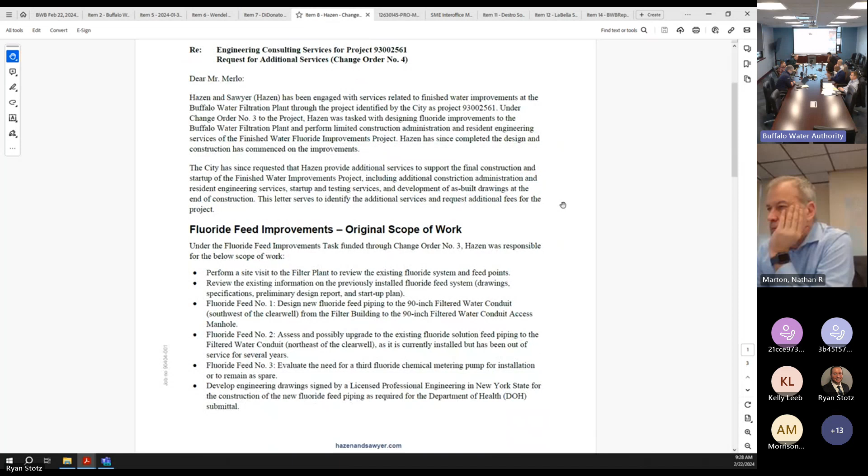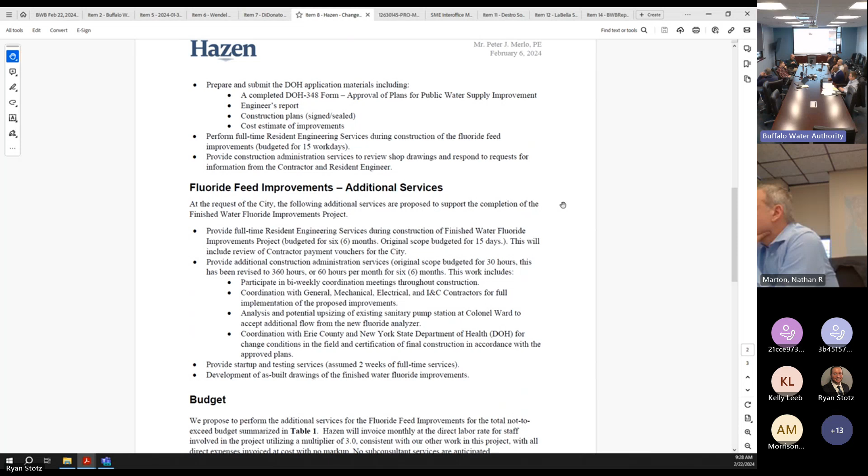This project is a large-scale project looking at improvements to our clear well. Part of this project is updating the chemical feed to the clear well at different locations, including corrosion control and other chemicals, including fluoride. Because of recent discussion and health department commitments we made, we first asked Hazen, this is the Hazen contract, to pull out the fluoride as phase 1 in the design, to help us get health department approval.

Now we're asking them to implement that, and then they'll continue with phase 2. Phase 2 is the big bulk of this project, which is optimizing our clear well.

We have a 30 million gallon concrete structure underneath our treatment plant that stores the treated chlorinated water. We need to optimize the baffling in there so the whole volume gets used up, because there's some short circuiting going on, so you're not getting contact time credit. Your water has to be in contact for such a long period of time to meet regulations. It does that with the clear well. We're fortunate to do it with other basins, but we would like to do it with our clear well too, so this is going to optimize it.

It's really installing hatches and gates, not that difficult of construction. The difficulty is what you have to shut down because you're doing it in your potable water. How do you dam it off? Can you do it with divers and fully disinfect? Are there construction techniques allowed in potable water? There are some, but not always.

So the difficulty with this is how to do what we need to do once they decide: I need so many more hatches, I've got to replace so many gates, so many valve arms. Okay, how are we going to do it now? There's the cost, how are we going to phase it?

That's phase 2. Back to phase 1, this is the continuation. The initial contract we had budgeted had $82,000 for the fluoride implementation, and really that was the design, the drawings, and getting permission. This is now the construction inspection, the implementation.

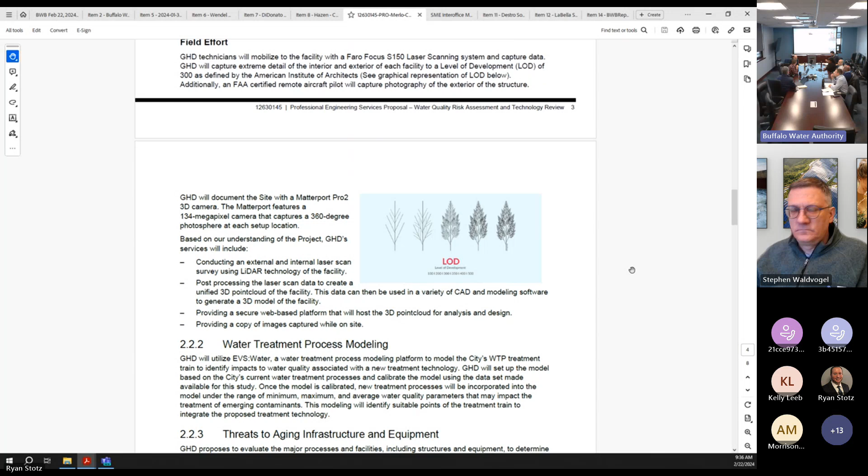May I ask a couple questions on this one? So my understanding of what we're going to be getting here is a technical memo, really kind of identifying threats as well as potential solutions and a high-level opinion of probable cost, right?

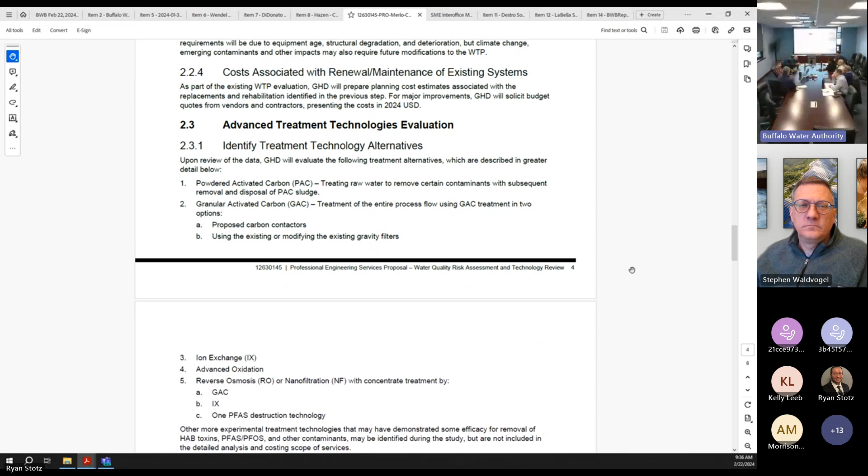Right, tools and treatment methods that give you a lot of options. That may give us multiple options, and what we're going to be using can be built and used in our facility in a practical way. Yes, I think that's one you're going to see somewhere, somehow. Is there something in addition?

I don't know if there's going to be a technology that replaces activated carbon. I think that could be part of your treatment tool. Where do you put it? How do you do it? And then are there other tools on top of it?

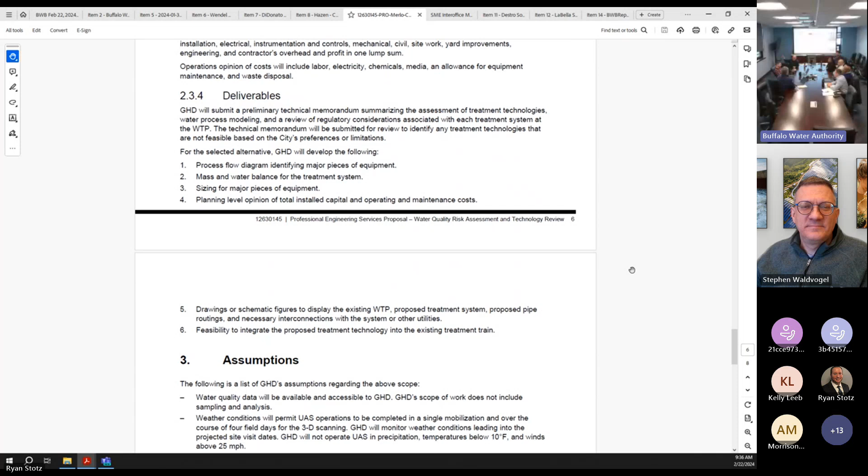All right, so okay, I see advanced oxidation processes as well—other things you want to consider? I don't know. Stephen, I don't want to take your thunder. I don't know, if you want, Steve, let's hear it. Don't say RO. You can treat seawater, I think. All right, you're up.

I think for the most part, enough has been said. There are three primary phases of this analysis. The first one is to look at your source water and attempt to forecast what the risks might be to your source water quality.

So Steve, are you predicting, are you going back to Toledo? Are we just going to say that what's happening there is going to eventually slide down this way? That's a possibility. As Peter mentioned, the conditions on this end of the lake are different. However, as climate change and other changes occur, it's increasing the likelihood that you could face something similar. It's probably not as prolonged, but those are the types of risks we want to evaluate.

The one risk you've obviously been experiencing is the intensity and frequency of storms, and you've proactively addressed that, or you're in the midst of addressing it. But as water quality changes, the other dynamic is that regulators are also changing. So not only is the water quality maybe worsening, but the regulators are getting more strict. We'll be looking at regulatory trends, including the contaminant candidate list over the last few cycles and what's on it now, and how that might impact your permit and what you put out to your customers. So that's the risk assessment from a water quality standpoint.

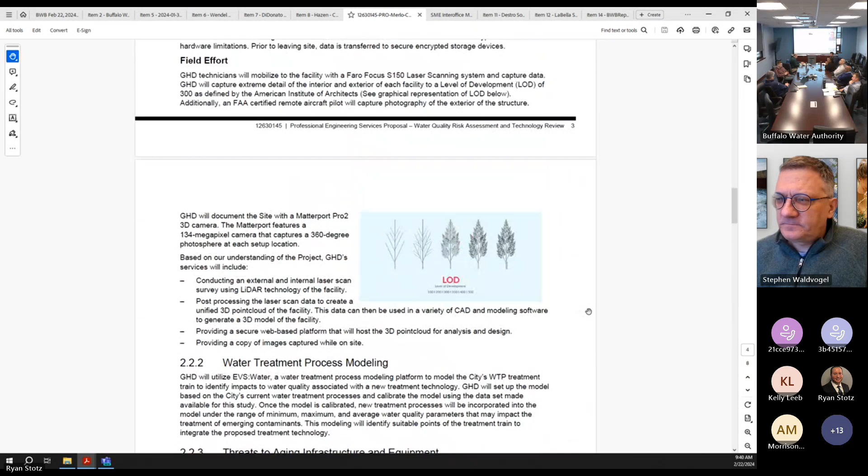So we're going to get a digital twin? The second tool is a form of digital twin. The terminology in the industry is changing now because digital twin means different things to different people. What it's being called now is a digital twin online, which is essentially a single point of reference for all as-is conditions of your plant and a tie-in to any relevant modeling or other process-related elements.

For instance, it will include a 3D visualization, so you can see your whole facility in 3D, and then it will link to the process model we build and provide for you. You may choose in the future to link that to your hydraulic model or any of the computational hydraulics Hazen has done, so you have a single point of reference for all of that. That's the intention — you'll have this digital twin online, and you can add to it moving forward in years to come.

Okay, all right, thank you. Board, do you have any further questions on this one? Peter, Stephen, thank you. So the total cost is 293.

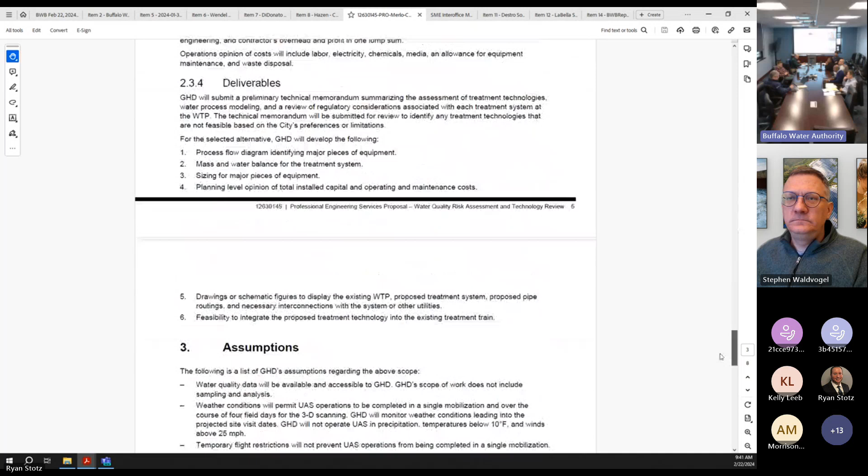Yes, so we are looking for approval of a contract for professional services in the amount of $293,700. That is for the work described by our principal engineer, which will effectively give us a way to evaluate potential threats, regulatory changes, as well as our own treatment capacity to help thwart those effects as they relate to climate and regulatory pieces.

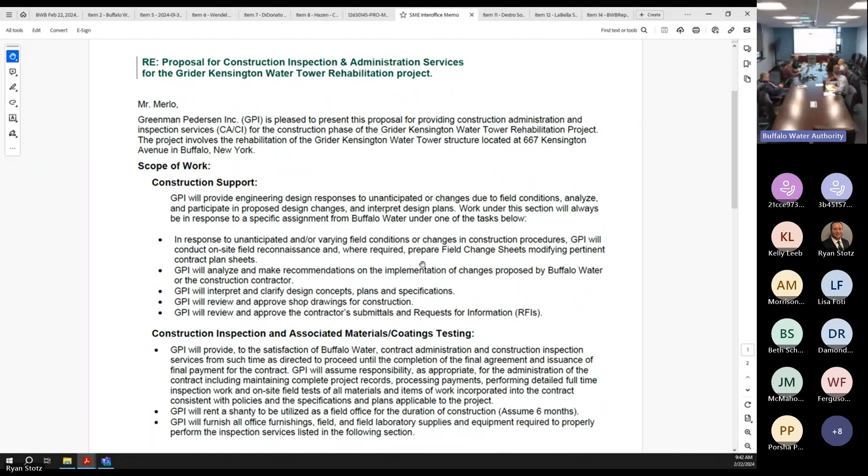This is for a contract that we are currently finalizing. We had a bid, this has been in our capital plan. This is phase 2 of the Kensington Tank Rehabilitation, the tank currently at Kensington and Grider. It's not officially labeled a historic structure, but anyone in the neighborhood would call it one. The tank is currently out of service.

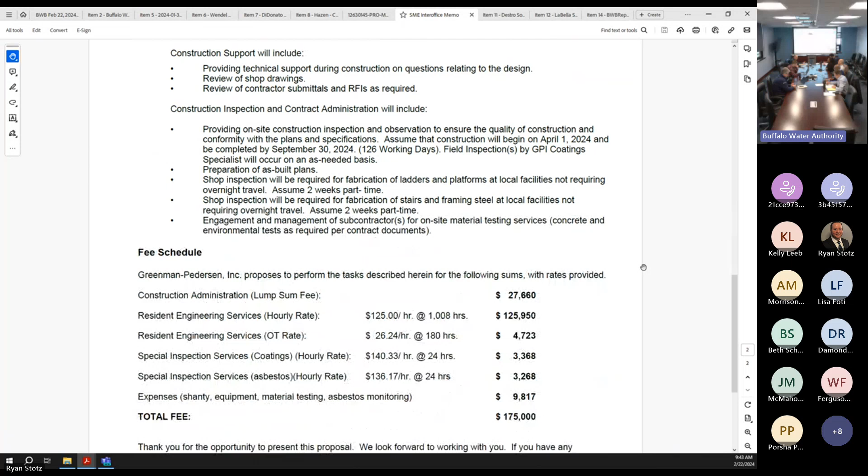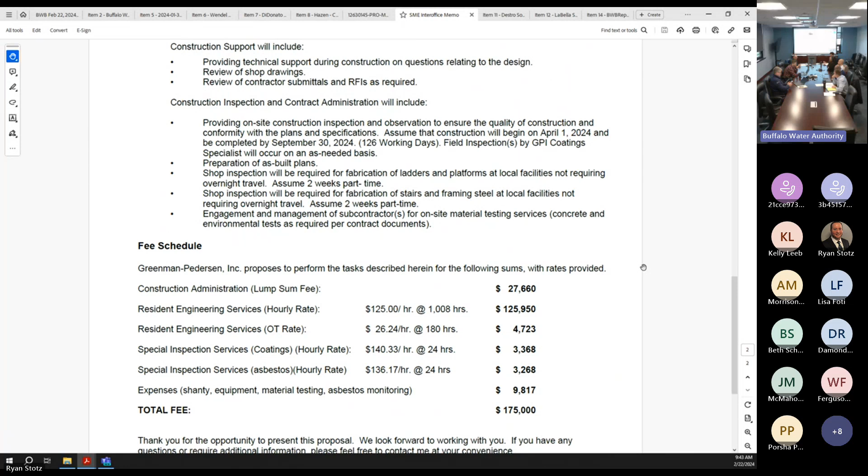We're looking to replace that tank, including the ferry tank, and looking to increase capacity, and that study is coming. Right now the board still wants to keep that in the neighborhood, but we're not sure what they'll ultimately do with that asset. So my direction was, let's stabilize that facility and structure right now, so we have time to make a decision without taking it down, without properly working with the neighborhood. We won't know the future, so let's stabilize it.

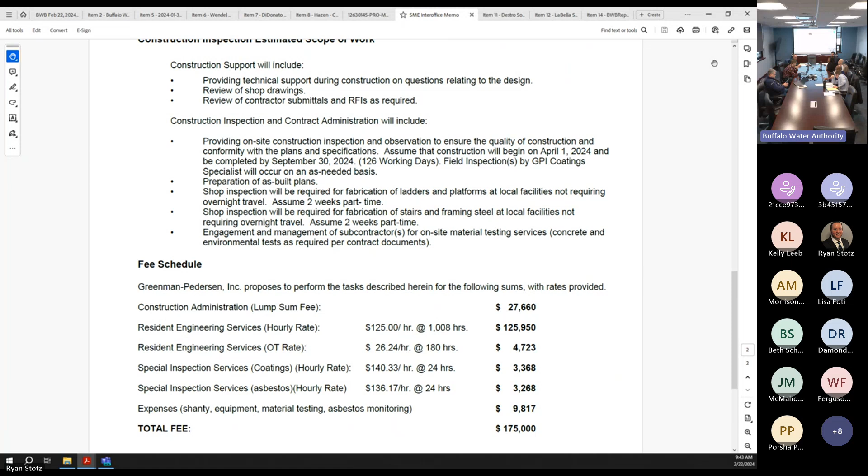Phase 1 was a new roof, and that was completed. This is phase 2 - the brick, everything outside, and the vestibule that failed, which really started a lot of this. At the end of the day, it'll be buttoned up, looking good, the fencing removed, and then we go back to maintaining that property. So this is really phase 2 of structural stabilization.

We have a contractor and resident inspection hourly out there for whatever services are needed. We have some coatings and asbestos if it comes up, but most of it, the bulk of it, is going to be the resident inspection managing that contract out there.

Very similar to the Kensington, or Grover - they keep throwing Grider in there again. We did the same thing with Grover Tank: stabilized the exterior and updated the pumping equipment inside, so that facility has bought us some time again to make a decision.

What does that facility hold in the future? Is that the asset in perpetuity, or are we looking to potentially replace it as we look to increase the pressure in certain areas of the city? Both of these projects bought us time. I asked for projects that give us an extended 10-year useful life, because I had to give a marker - if I want 50 years, you're going to spend a lot more money. Understood.

Okay, thank you very much, Steve.

Board, so we are seeking a contract for construction support, inspection, and administration with GPI, as recommended by our principal engineer, in the amount of $175,000.

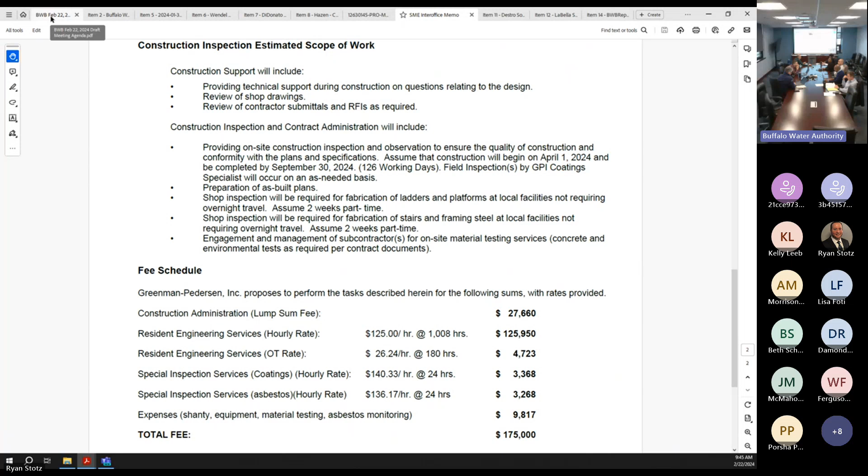We'll now move on to item number 11, Destro South project, for a time extension for that one. Mr. Merlo? Yes, thank you. Peter Merlo, Secretary of the Board, Principal Engineer, Division of Water.

This is really the 4th contract. There are 4 contracts that we have managing our distribution program, and that program is $25 million between the 4 projects. This is the 4th one. This is in the, or no, this is south - this is on Abbey Street and in that location.

So we're looking for increased inspection services to continue, that's going to be subsequent. But the first was, let's get the contract extended to an appropriate date, and that is we're looking to extend that to September 30th, 2024.

Okay, is that going to push any of our stuff, or are we going to be all right with that? No, actually, this contract had a little more time in it for construction length, so the extension is only several months versus the whole season. We anticipated some spring construction, so we're pushing it out.

To be honest, initially I asked our consultants, in the beginning we weren't sure how long pipe materials were going to take, so we wanted to allow contract times to account for those orders that got hung up for months. I told them to put in extended contract times, but our consultants were a little leery about giving them too much, so some gave them more leeway than others. What we've done is align them all now to this construction season through these actions, contract extensions.

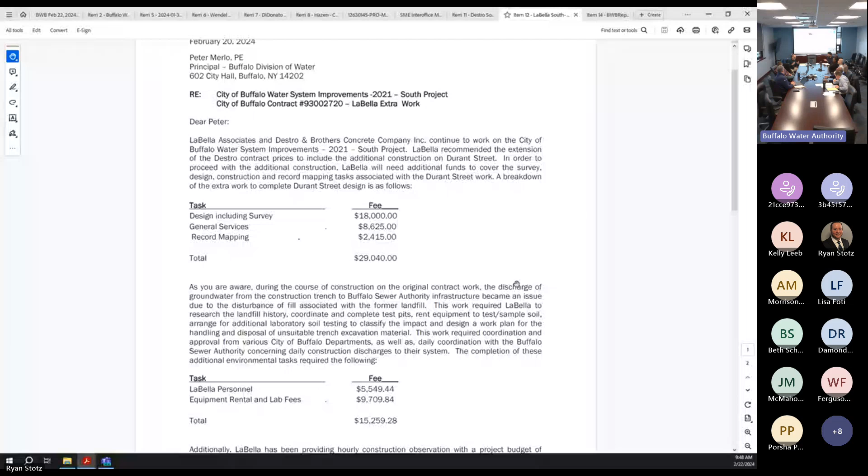The first thing is to get Durant Street design approved by the health department. I can't give additional work that the health department hasn't approved. So if we don't do it now, I have a design on the shelf. So this money is still well spent.

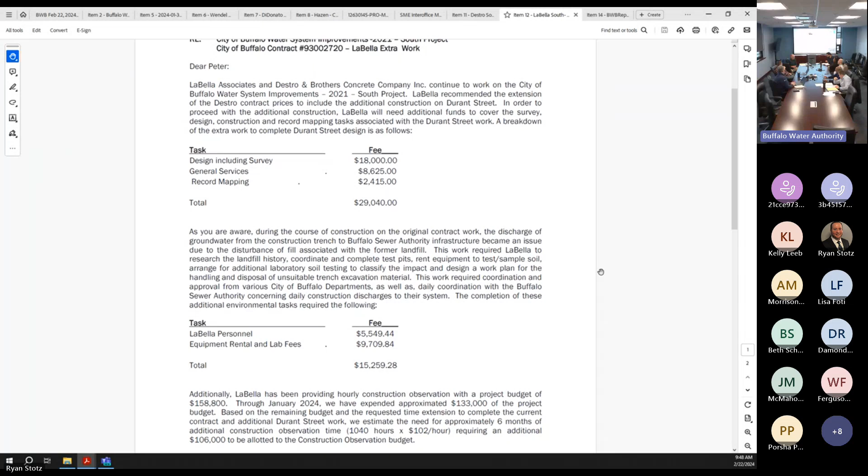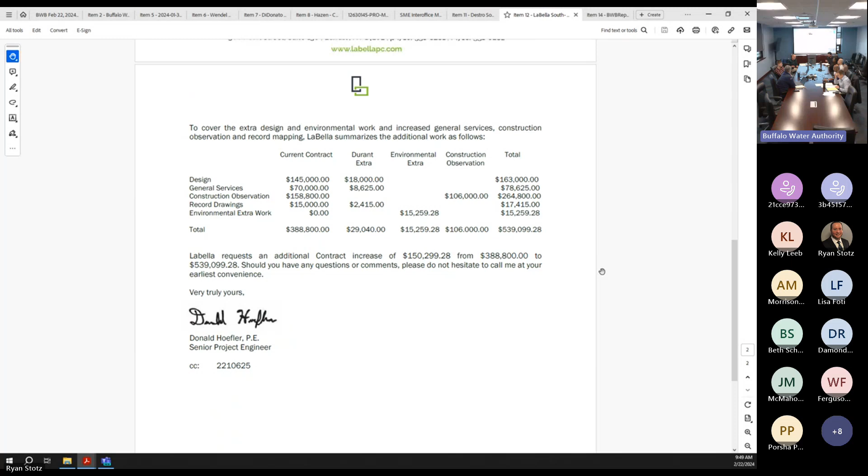So we picked a location, right? These are streets on our current capital list, so we have plenty, we're just moving them down. We have an allocation of 25 million for our next bond sale. I currently have 30 million we're going to design around, so really there's going to be more coming. So we're always going to be chasing our water lines.

So if there's an opportunity, not to waste money, but again we're going to at least get the design, put ourselves in position. If all of a sudden the consultant feels we can release them to do this, great. But either way, we want to maximize our contracts, or at least get close enough that it's within reason. Because if you're less than 25% of an item, they have the right to come back, and we don't want to get there arguing with our contractors. So we're trying to make sure that we're maximizing funding, if we can minimize arguing with them. We're trying to maximize our amount of funding on this one as well.

Right, and these are locations that qualify for the ARPA funding that is funding a good portion. Excellent point, Chairman. Thank you.

Okay, so now we have these two items. This one we're now discussing is for a cost increase to LaBella's contract, who is overseeing this project. So it includes a little bit of design here for Durant Street, some environmental work we talked about as well, and the majority of this $150,299.28 is construction observation. $106,000 of that is a not-to-exceed piece.

So what we're looking for is two items, right? One is you're recommending a request from LaBella for $150,299.28, and the one before is technically a no-cost time extension for Destro, right?

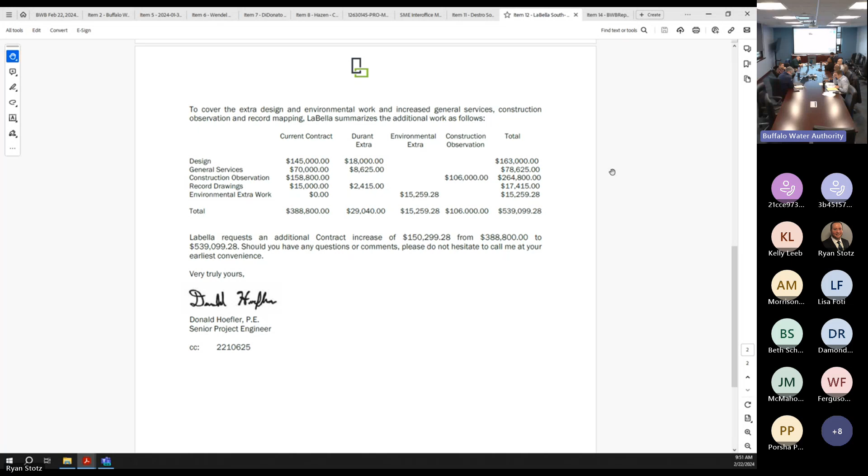Is there a motion to approve? Denine, so moved. Sunderland, second. The motion is properly seconded. Any questions? All right, hearing no further questions. Motion to approve?

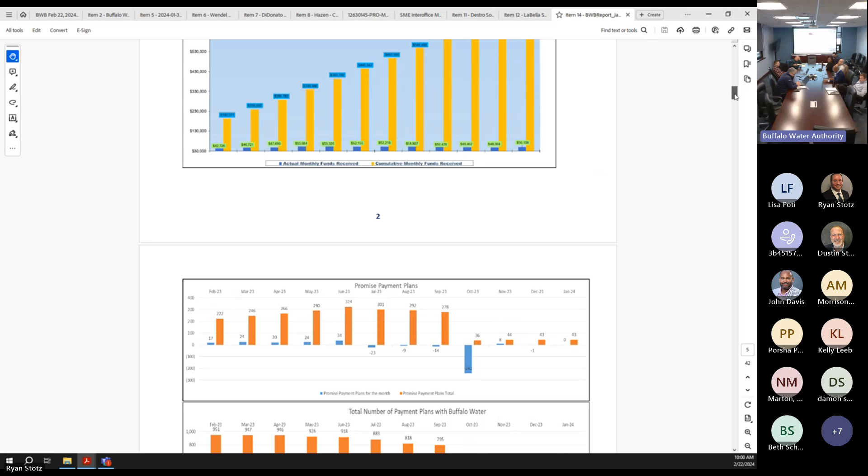I did want to mention to the board, we have started bi-weekly process meetings where Peter and I run the meeting, coming up here in a few minutes. We engage with the operations team down there due to the amount of capital work and ongoing O&M work. We need to be very clear in what we're doing and how we're doing it, and communicate it properly to the operator so there is no impact. So we're doing a concerted effort every two weeks, going over what impacted the plant the previous two weeks and what could impact the plant in the coming two weeks. Very useful discussion, and we've eliminated a lot of potential issues in advance. So that's been going well.

I just wanted to add on a closing note, limit accounts. I wanted to review those. It appears specialty maintenance, on page 13, is the only one nearing additional funding. It's currently at nearly 80%, at 952,000 out of 1.2 million. So we're going to have to go back, Doug, and take a look at where we're at and what's coming on this account, and talk about it next month at the board meeting. The rest of them look good.